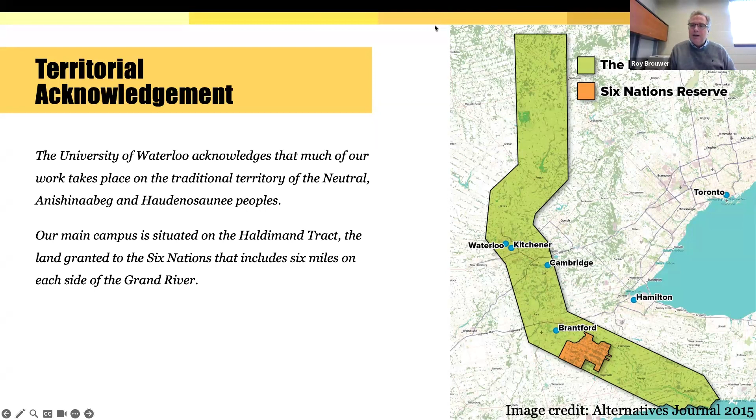Our active work towards reconciliation takes place across our campuses through research, learning, teaching, and community building, and is centralized within our Indigenous Initiatives Office. And I invite you to take a minute to consider where you are on the territories that you are.

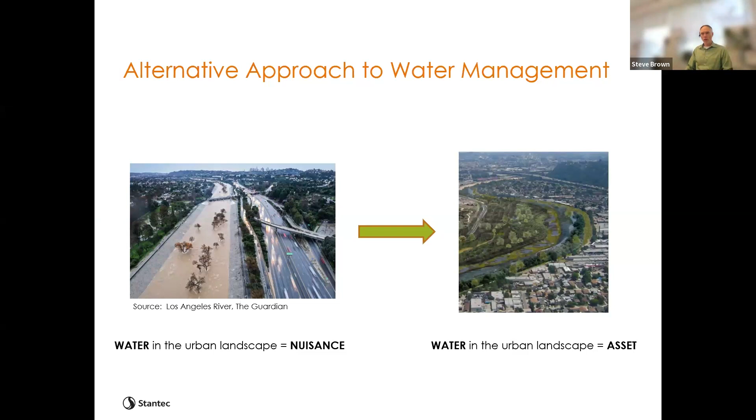So while there's more access and ability to appreciate them, there's also an ability to have decreased capital, operation and maintenance costs. There's increased climate resilience with a green solution as opposed to a gray one, and often a reduction in liabilities, whether that's flooding or erosion or other issues. So we're starting to see a shift in water management and water assets. And on to the next slide.

There we go. So one of the common features of water asset projects is that there's often a multitude of co-benefits achieved while addressing your primary objective. And those benefits integrate in different ways within the surrounding community. I know this is a long list on the screen, and I'm not going to read through it line by line.

That's not the purpose. The intent here is just to highlight that, hey, there's a wide range of different benefits that are associated with water projects, from the obvious ones like flood protection or drainage improvements or whatever, to maybe ones you don't expect, like health and well-being.

There's an article last week I saw that said walking in nature has the ability to allow you to focus better, as opposed to walking in other locations. The ability to increase resiliency and react to changing climate and other conditions, and increased real estate values are different benefits that fall out of some of these other projects as sort of an extra benefit that wasn't really the intention originally when you go into it.

So recognizing that stormwater assets have value, how are they managed and implemented? In an urban setting, historically, stormwater and surface water projects have been funded through general taxes. This differs from drinking water or sanitary assets, which are funded through a utility structure, where users pay according to how much they use. So when I use a liter of water in my house, I pay a utility charge to the city for that water. So per liter of water, I pay a certain amount.

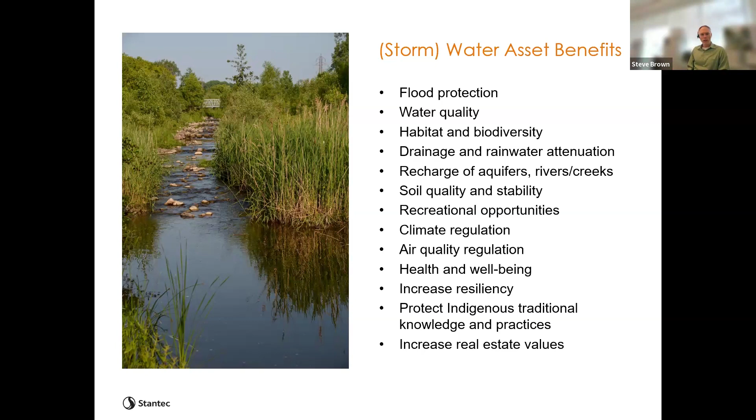And what I'm going to do now is walk you through the City of Kitchener's example of the stormwater utility, to give you some context and some concrete information for how that has happened. For anybody who's calling in from further away, Kitchener is located about an hour west of Toronto. It's the largest city in Waterloo Region and one of the fastest growing urban centers in Ontario. Like many parts of Canada, there was a significant development boom after World War II and decades of rapid residential growth well into the late 1970s. So a great big long period of expansion.

And particularly as it relates to surface water, the philosophy was what we talked about. It was an inconvenience or a nuisance and needed to be channeled away from development and people as fast as possible. So what you wind up with is a lot of natural watercourses that have been turned into concrete channels, destroying any natural habitat or any equilibrium that existed on the landscape prior to that time. So that brings us to today and the current state of affairs, which is a lot of gray infrastructure and some significant flooding risks, particularly in some of those old historical floodplains.

So the map on your screen of the City of Kitchener highlights the areas that are serviced by modern stormwater facilities, I guess. And the list of assets there is, I thought, interesting just to say, hey, there's a lot of stuff in the stormwater asset bucket, and those are increasingly being recognized as providing value. The replacement value for all the city's stormwater assets from 2020 is a little over $1 billion. That's billion with a B. That's a big number, and the City of Kitchener is not a huge city by any stretch.

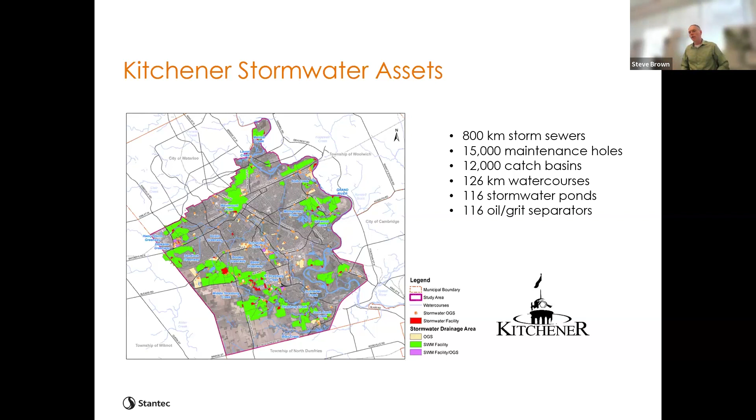And one of the things that's eye-opening is that there was a value of 0 assigned to it as little as 5 or 8 years ago. So that sort of reflects that change in philosophy and approach to water assets that I was talking about.

So how did Kitchener come to implement a stormwater utility? It started with Victoria Park Lake. Victoria Park was constructed in 1895 on Schneider Creek, an area which at the time actually was outside of the city of Kitchener. It was in the country, which is ironic since it's right in the middle of downtown now.

The lake was sort of the centerpiece for the big park development all around it. So really a nice area. It's attracted a lot of people over the years, and something the city was quite proud of. In the years since it was constructed, the city grew a lot around it, so that it's now in the middle of the city. Many of the water courses were channelized and converted over that time period. And the city came to get into a routine where they had to clean out the lake every few years.

The most recent clean out or retrofit was 2010, 2011. And when we started talking about that with the city, they were shocked and surprised to find that the construction value of that was over $10 million. And most of that was related to sediment removal. At the time, a typical road reconstruction project cost about $2 million for the city. So what the city found is that they had about 5 road construction projects all of a sudden that they had to do that they had no funding for.

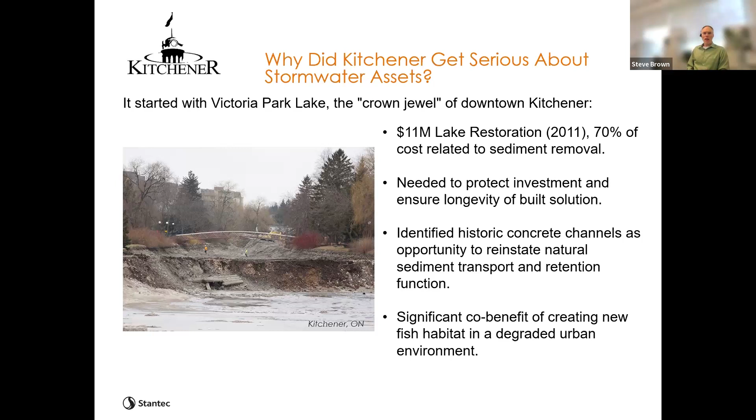It had a significant co-benefit too of creating a lot of new fish habitat in areas that didn't have any before. So that was the germination of the idea of moving into a stormwater utility for the city. This photo, by the way, is Victoria Park after the reconstruction, different bridge, but same area.

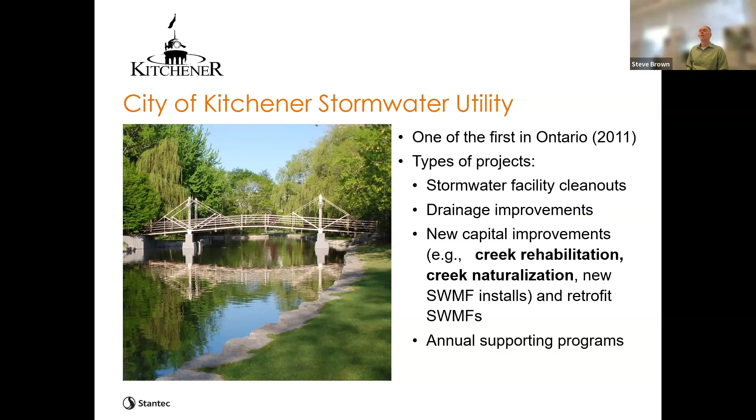So the city initiated the stormwater utility and became one of the first in Ontario in 2011. And what it allowed is the city to undertake a range of water-related projects, from simple drainage improvements to stormwater cleanouts to regular supporting, monitoring, and modeling projects, as well as a number of new capital improvements. And that's what we're going to talk about today, the creek rehabilitation and naturalization projects that get funded by the stormwater utility.

So the utility's been in place for 10 or 15 years almost now. The annual budget is up to about $30 million a year. So that has seen some significant growth since it was started. And the city has observed some real benefits to the utility structure. And the first one they mentioned is funding equity.

The stormwater charge or stormwater fee is based on how much impervious area you have on your property. So if you have a bigger impervious area, you pay more as a stormwater fee. So that attributes the amount of water that you're contributing to the system to this fund that does retrofits, does improvements to manage those water assets.

It also allows the city to recognize site improvements. So if you undertake measures on your property to minimize or reduce or improve the drainage off your site, then you can apply for and receive credits from the stormwater utility to reduce the amount of fee that you pay, up to about 50%. So again, it gives some incentive to people who are contributing to the fund to mitigate that contribution as well.

It also gave the city the ability to leverage those known utility dollars to gain other levels of funding. So they've been quite successful in getting both provincial and federal funding grants to expand and do more work within the stormwater utility. So they've been quite good at that.

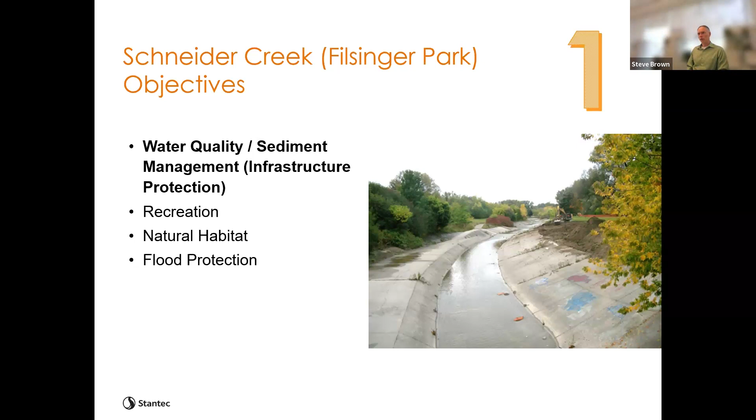A really important co-benefit, though, was the natural habitat creation. The removal of 2 kilometers of concrete channel, like you see here, and replacement with a natural channel actually created a whole lot of fish habitat through this area, and let the city establish the first municipally owned habitat bank with the Department of Fisheries and Oceans. That was the first project that was included in that. There are also benefits for recreation in terms of park and trail use, as well as flood protection. So a bunch of co-benefits there, but the primary one was sediment management.

So a little background. Sediment delivery was really efficient, as we've talked about. The city had been dredging Victoria Park Lake about every 15 years for the last half century or so. Most recently, the early 80s, 1996, and then the 2010-2011 version. And the reconstruction of the lake included a forebay that was designed to contain sediment up near the upper end of the lake and limit the frequency that they had to dredge and clean the entire lake.

So it was estimated that the forebay would be dredged about every decade or so, and that the lake would only need to be dredged about once a century, which would result in a considerable cost savings. So you don't get that $11 million bill every 15 years.

So the image on the left, the map there shows the study area circled in red. You can see it's right in the middle of an urban setting. There are about 3 kilometers of concrete channel in there. You can see the red star is actually Victoria Park Lake, to give you context of where we are. And the concrete channels run right down to the lake, so they're really efficient at funneling flow and sediment down there. So the intent was that by removing the concrete, natural sediment equilibrium could be reestablished, thus protecting the lake and the infrastructure investment that the city made downstream.

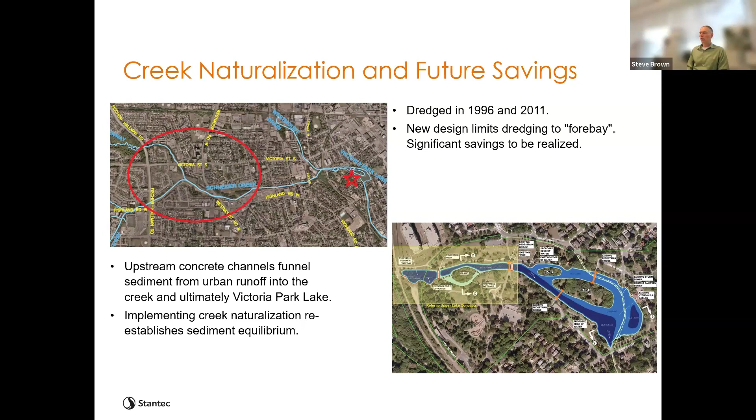So this is our before and after shot. The photo on the left there is an aerial view of the lower part of Filsinger Park before construction. You can see the nice concrete channels there. The trail network is also visible as well. It's actually hard to tell them apart, as they're both hard structures.

The image in the middle is immediately after construction. You can see the trail still exists, but the concrete channel has been removed and the channel plan form has been altered to be more of a natural meandering pattern. And the image on the right is a drone photo looking up one of the branches of the creek there after the restoration. Again, you can see the natural patterns and some of the vegetation starting to take hold as well.

And just as construction was finishing, so it was actually late November 2014, there was a really significant flood. There was an early snowfall that year, something we haven't seen much of this year, and then a big rain event. All the floodplain areas were inundated for a couple of days. We were actually a little nervous about what we were going to see when we went back out there, but when the water finally receded, we went back out and were very pleased to find that there was virtually no damage at all. A few minor things, but nothing significant.

But one of the biggest observations was that across most of the floodplain, there was 5 centimeters or a couple inches of sediment that had been deposited everywhere. It actually was so significant we had to reseed some areas that hadn't germinated yet because they were buried too deep. They weren't going to sprout. So pretty clearly, it demonstrated that the design was very efficient at helping to remove some of that sediment that would have all wound up down in Victoria Park Lake eventually.

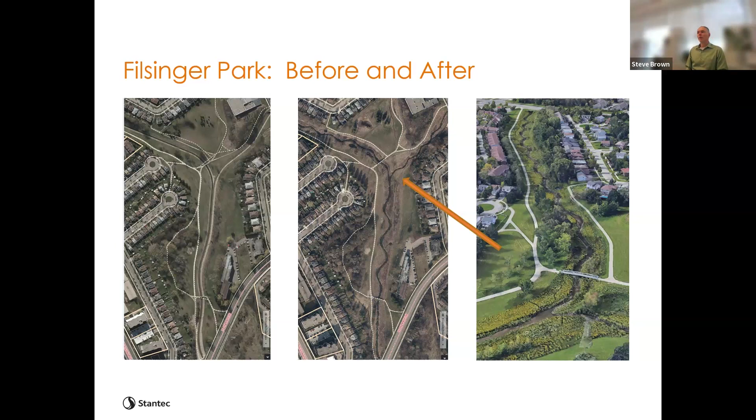So just touching back to our project objectives here, sediment management was one of the primary things. So we've got a wider floodplain for sediment to settle on, provide some additional flood protection capacity. And the channel is actually narrower and has a bunch of habitat features that weren't present before.

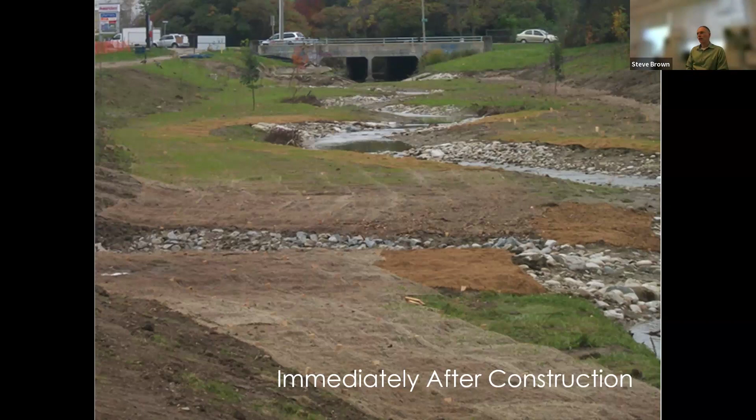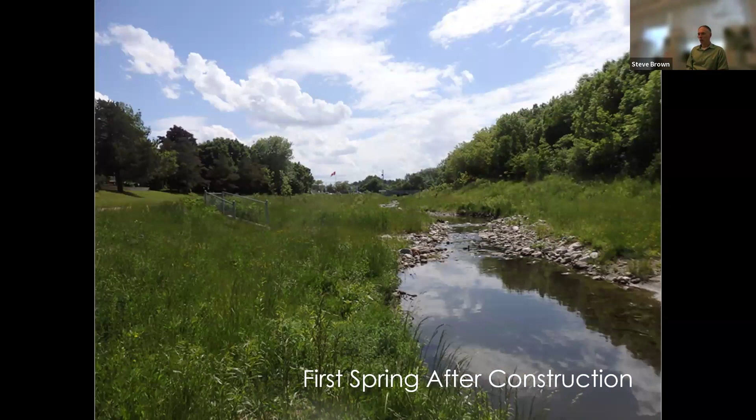This is what it looked like at the first spring after construction. So again, same locations, a little bit further away from the culvert, but same general area. Again, you can see the wider floodplain is present here. It's growing in quite nicely with lush vegetation there. Channel is narrower. We've got some habitat structures in there that accommodate a lot of fish, and starting to stabilize quite nicely.

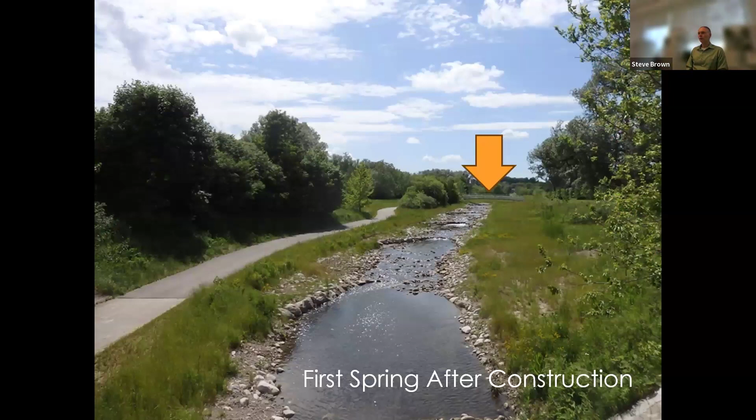So that just gives you a bit of a context for the next couple of pictures and the after views. So there's the first spring after construction. See the new pedestrian bridge there, the same location as the old one. And again, we've got a wider floodplain. We've got natural areas, so it's not going to just convey the sediment and flows all along. It has the opportunity to capture and settle stuff.

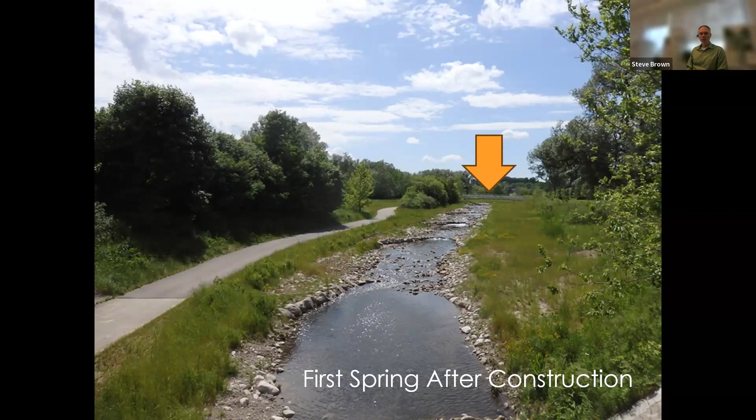So it's developing and maturing quite nicely through the entire system. It's actually one of the few spots you can actually see the stream now. Stuff has grown in quite thickly.

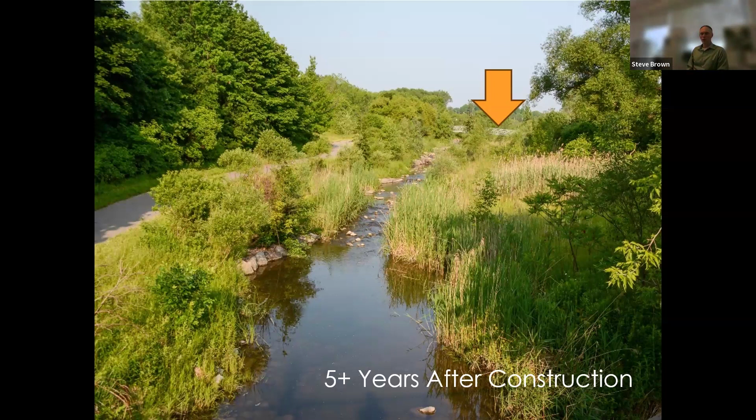So just revisiting our objectives here. Sediment removal was the primary one. So our evidence during construction was pretty clear that it has the ability to remove sediment. The forebay in Victoria Park has been dredged once since construction. 2018 cost a little under $400,000, which is a far cry from that $11 million. And the lake doesn't require any cleanup, so it seems to be working effectively from that perspective.

Fish were observed through the new channel everywhere, and virtually as soon as we put water in the channel, there were fish, and not just a couple of fish. There were fish everywhere, all kinds of them. It was quite amazing that they appeared so quickly. The park trails were also protected and enhanced.

I had a lady come up to me at our formal ribbon cutting after construction was completed. There had been some public opposition to the project, and she was one of the ones that we had talked to beforehand who didn't want to see the construction happen. And she said to me, if I'd known what this was going to look like when you started, I would never have objected to it in the first place, which tells me that the new aesthetics were much appreciated and welcomed. It's also quite rewarding to have her seek me out to tell me that.

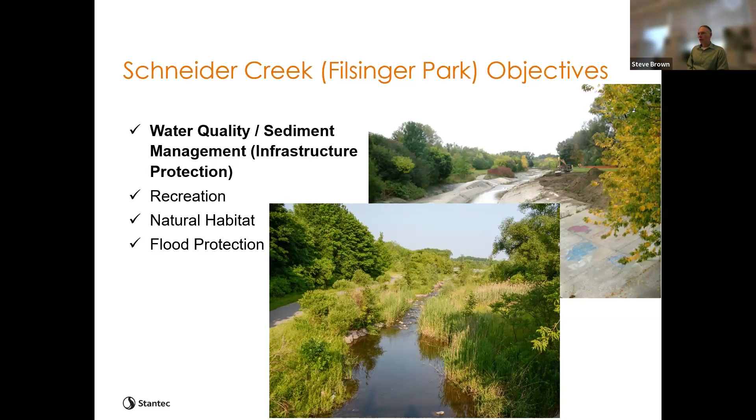And the flood protection has been maintained. The flooding is contained within the park, so no external areas or private property get flooded through this reach. So we seem to have hit all our various objectives.

It also had recreational benefits as well, in that this is a link on the Walter Bean Trail that runs along the Grand River through Kitchener, and this was sort of a gap in that trail system, so it's able to be connected. So our before and after photos again.

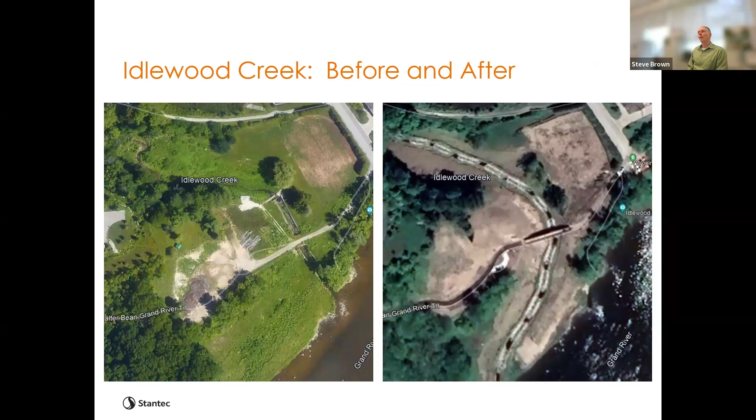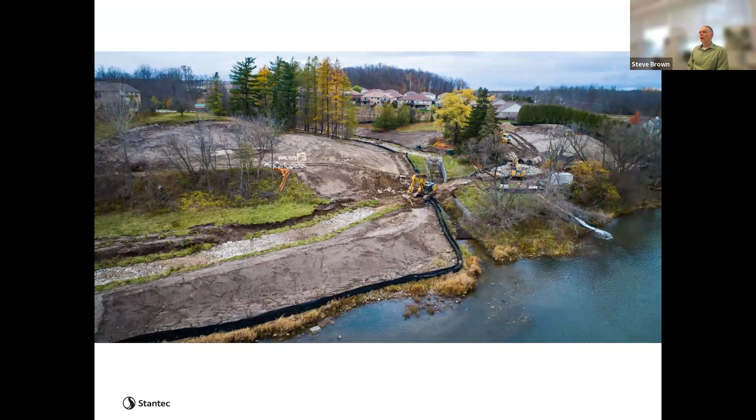That's a photo of during construction work. The channel is actually being worked on. The old gabion line channel is still present at this point, but they're working at removing that. And that's what it looks like, same location, roughly the same view from this past spring. You can see the channel has grown in nicely and naturalized.

The pedestrian bridge is present linking up the trail systems. And another thing that got added through public consultation was the public was interested in getting a canoe launch down to the Grand River, and that's what you see at the bottom right-hand corner of this picture. That was constructed just after the channel works were done.

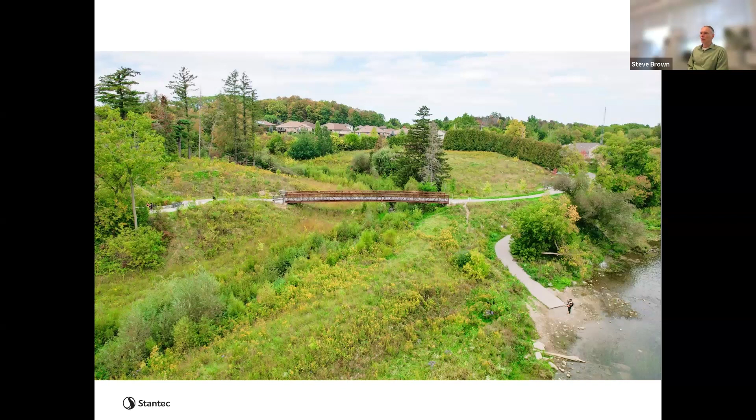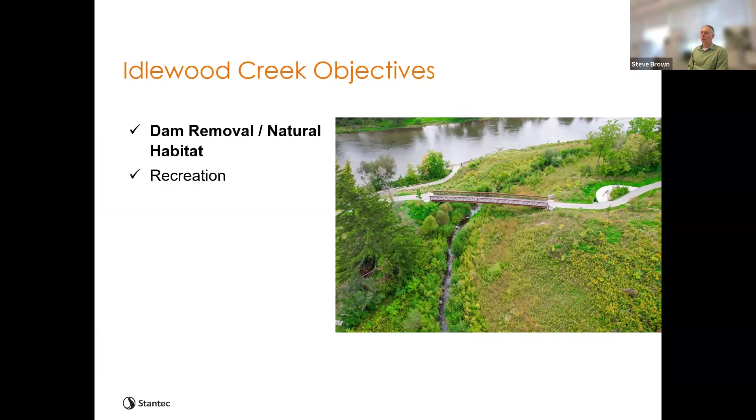So again, going back to our objectives, dam removal, it was removed. We've reconnected the stream system from the Grand all the way up. And the spring after construction was completed, we found young of the year minnows, newly hatched minnows of a species that was not present in Idlewood Creek, but was present in the Grand River. We found them about 2 kilometers upstream, which tells us that those species were able to navigate up the channel and spawn successfully up in Idlewood Creek.

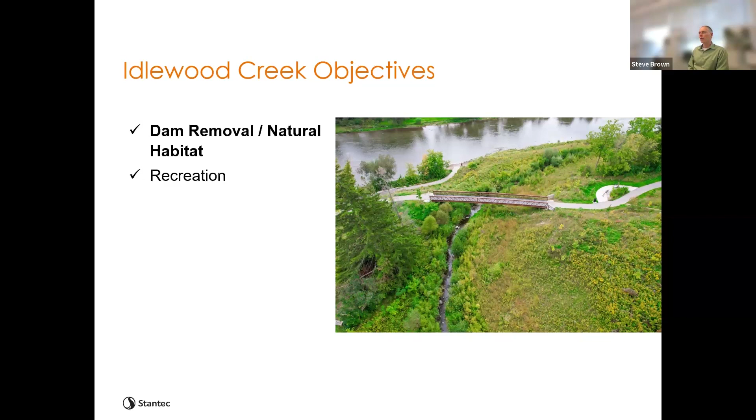We've got a new bridge and trail system connected, and also we had a canoe launch ramp that was incorporated into the project. So again, we seem to have hit all of our various objectives.

A third project, I'll go through this one relatively quickly. Montgomery Creek, it is located in Wilson Park in the city of Kitchener. The channel had historically been straightened, but not concrete or gabion lined, but had pretty poor definition, around 800 meters long. There was an exposed water main in the Vanier Boulevard crossing, which needed to be repaired. Pedestrian crossing was pretty poor and regularly flooded, making our trail connections difficult at times. And there were some drainage issues in adjacent areas that we wanted to try to protect.

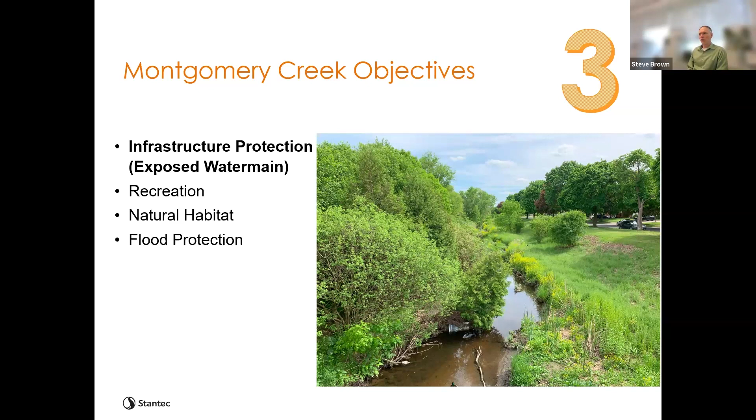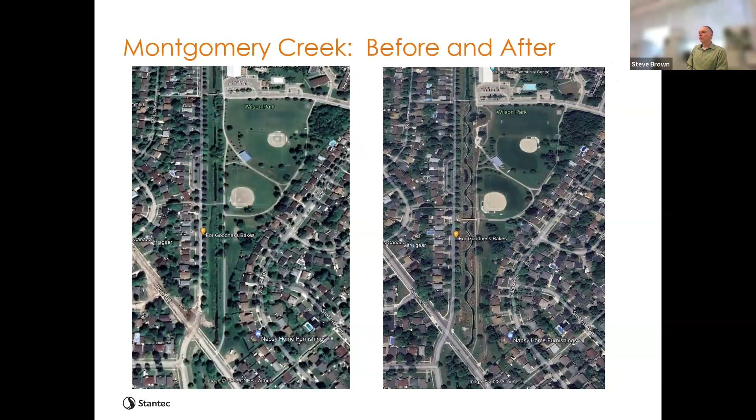So our before and after air photos again here. Before on the left, see a nice straight channel that runs right in between the trail and the road. And on the right is shortly after construction. You can see the channel pattern has shifted fairly significantly to a much more natural looking pattern.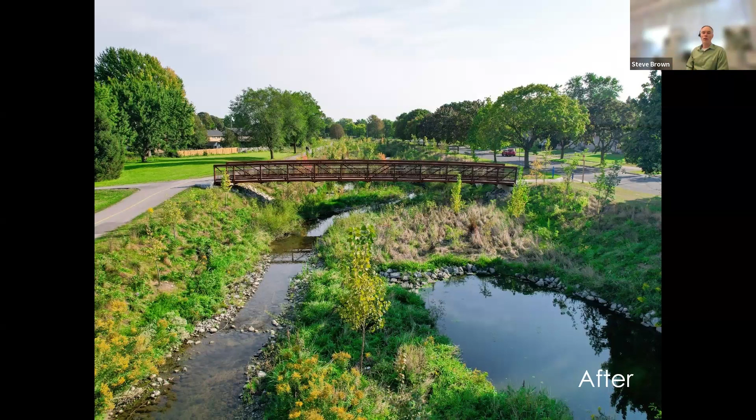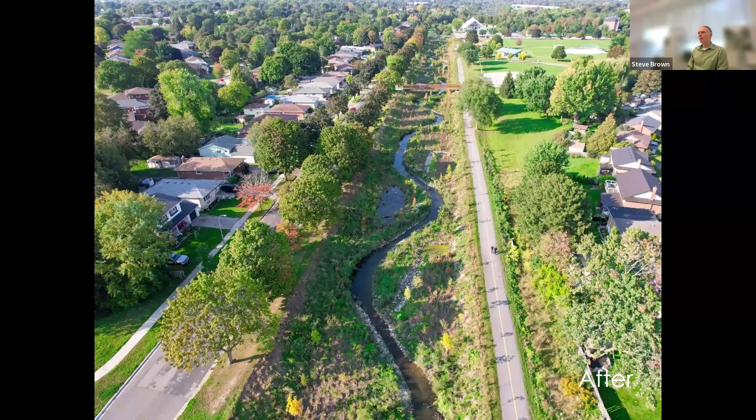There's an air photo of the finished work, and you can see the pedestrian bridge there about 2/3 of the way up the screen. And that's what the new channel looks like. Got much better habitat and conditions in it. Vegetation is appropriate, and the structures under the water are also good.

One of the other things we did with this project, there were 2 major storm sewer outfalls that came into Montgomery Creek right here. They were really hidden away. You didn't know they were there unless you went looking for them or you knew they were present. So we've pulled them back a little bit and opened them up so they're more visible, more accessible. Not that you want people down in there, but again, it gives you an appreciation for what happens. So you can see the trail that runs right along the edge now, so that they're much more visible to the public as you're around and in the system here in the park.

The other major addition was improved trails. The main connection that runs parallel to the stream was maintained, but we added some areas for a side trail there with benches and areas to sort of stop and linger. There's areas to get down to the stream as well if you wish, which was not really available before, and seems to have been well appreciated by the community as well. This park is always really busy. Anytime I've been out, it's been full of people.

So again, going back to our objectives, infrastructure protection, that water main was removed. So that's no longer an issue. So that was satisfied. Our channel is much better now. There are more fish present and in better conditions. We improved local drainage and neighborhood flood protection where we needed to, and the new pedestrian bridge allows that trail connection to be available more often than it was before, and in a better state, easier to access.

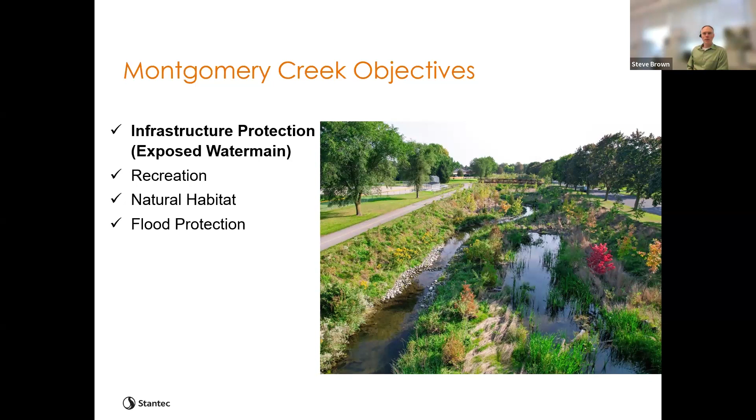And that is it. Just a quick summary here, just stuff we've talked about. We talked about the value of stormwater assets, how the recognition of those has changed from a traditional sense of water being a nuisance to now it being an asset and a benefit to a community. Introduced the stormwater utility and used the City of Kitchener example for how that has come to be and what types of projects it can do.

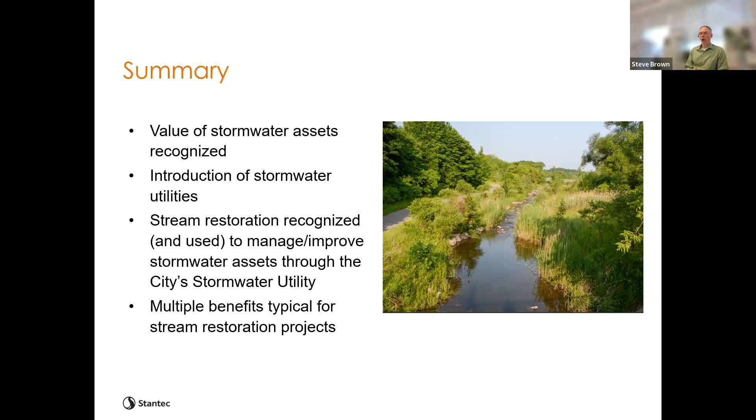We talked about stream restoration and how it is recognized and used to manage and improve water assets, in this case streams, within the City of Kitchener. And I think that is a tool that will continue to be used both in the City of Kitchener and elsewhere. And the other highlight here is that there are multiple benefits from any typical stream restoration projects beyond just the singular reason to do the project initially. There's always a range of other benefits that accrue as well. And with that, I think I will pause and have some time for some questions and answers.